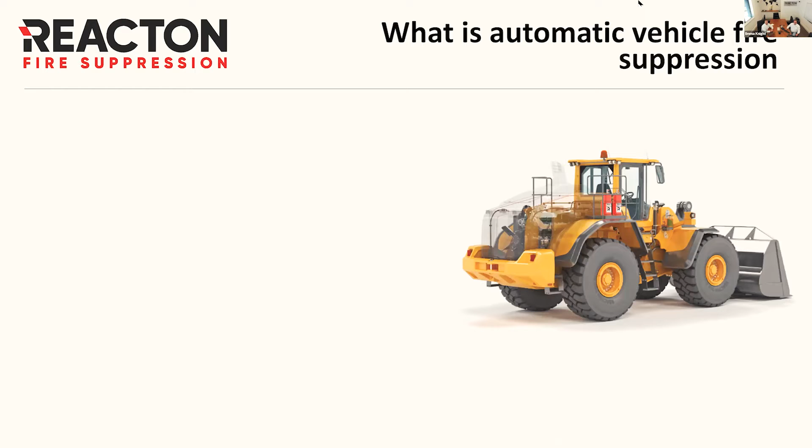So a very simple introduction here is what is vehicle fire suppression. You can see on the side here we've got one of our systems on a machine, but what is automatic vehicle fire suppression? Really it's a way of suppressing or extinguishing a fire event on a vehicle. And when you say suppressing, that's controlling. So they are two different items there. It will need to be completely autonomous. That means that the detection system has to be completely attached and combined with the suppression delivery system to be able to trigger the system and have no intervention from any humans at all.

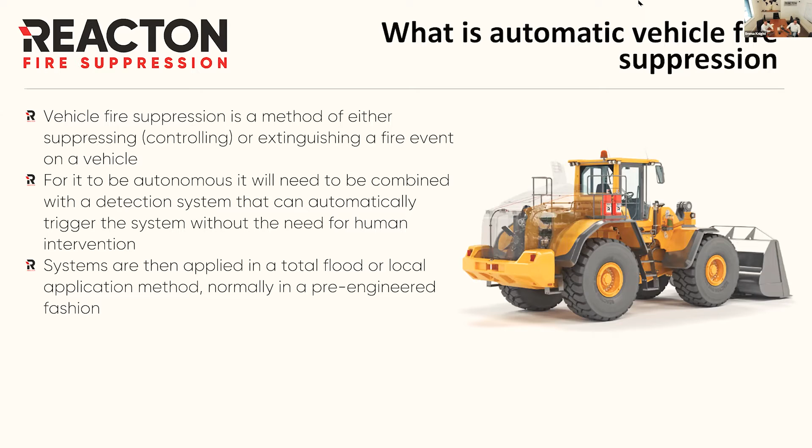What you commonly see for these automatic vehicle systems, they'll be designed in a total flood or a local application method. With the vehicle fire suppression world, they are typically pre-engineered. If you wanted to sum up what an automatic vehicle fire suppression system is, in its simplest form, you have a detection system, an actuation system, and a delivery system. All the agents used on these vehicles have already been tested, and they are the ones that are correct for the classifications of fires that you see on vehicles, such as Class B with the hydraulic fuels and flammable liquids.

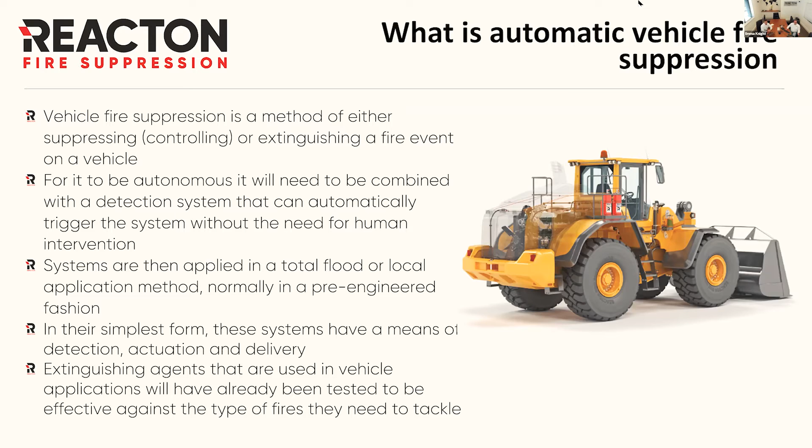So what we want to talk about on this slide is what does this actually look like? What is a typical fire suppression system? We can break these up into key areas, which is probably the easiest way to go through this. Given the time of this webinar, we can't go into extreme detail about each part. But the first part of the system is the containers, the extinguishing agent storage system, and we've got a picture of one of those up on the top right. In this application, we've got a dry powder and a wet chemical.

The extinguishing agent storage system basically holds your extinguishing agent, and these systems can either be stored pressure. In the Reacton example, we have it at 25 bar. However, there are some systems out there that are unpressurized and use a cartridge to propel the system. You then have your detection system, and again, this can be achieved in many different ways.

The most common type that you see in vehicles, because of the complex nature of an engine bay, would be a linear sort of detection, and sometimes that can be electronic, or it can be pneumatic with the burst tubes that Reacton make.

We have a distribution network, which essentially is another way of talking about your pipe work, your discharge hose. This is where the agent comes out of the cylinder and is delivered towards your discharge nozzles. And then you have the actuation system. This is really a means of actuating your cylinder.

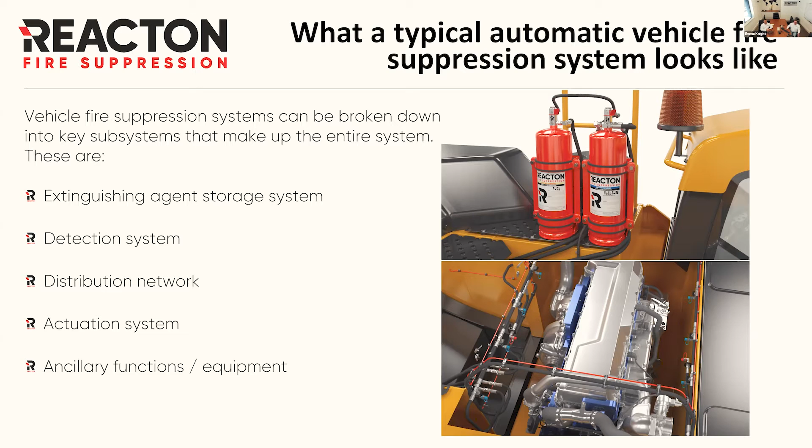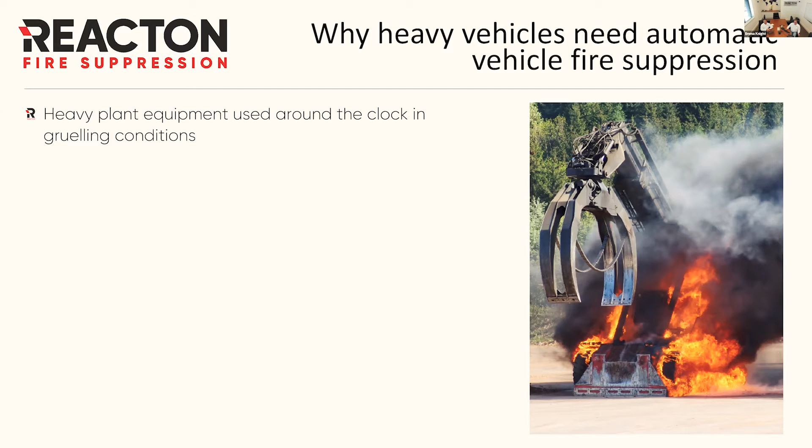Okay, and then on this slide here, we've got why heavy vehicles need automatic fire suppression. A lot of these are very obvious. We're going to run through them pretty quickly, but they have an absolutely demanding life, and they are worked within an inch of their life because it earns you money. If the vehicle's not working, you're not earning money, so they are pushed extremely hard.

So all of these excessive functions that you have on that vehicle increase the temperatures. You have to increase the cooling. Then the flammable fluids are getting much hotter, and it all creates this perfect environment for a fire. And this is why we see them. It's extremely important to have suppression on these.

But if we go to the next one, we've got the problems of the human part of this, where they may not be around to be able to use a fire extinguisher to put this fire out. But even if they are, are they trained? Do they know where to apply it? Are they going to be able to get access to that fire?

The last thing you want to be doing when there's a very high energy fire is starting to open up some of the engine compartments and be that close with the fire extinguisher. So this is where the automatic fire suppression side is really key.

And I think you're going to see that, everyone, later on in some videos shortly. There are two things that Ed just mentioned that I want to reiterate: the human factor, and you're going to see one of the videos of a large fire on a piece of equipment shortly.

The machine is totally unmanned and is operating at full capacity when the fire happens. So I think the time from when the fire ignites to the time that the first person is on the scene is around 25 to 30 seconds. So the issue you've got there is if a fire has been established for 30 seconds, not only have you got a significantly damaged machine, but you've also got a more difficult fire to extinguish as well.

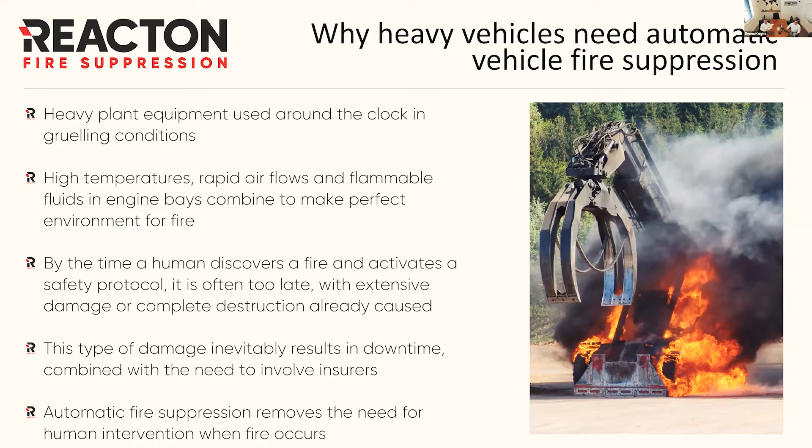So this video is a fantastic video. Again, you'll get this on the presentation. This is a Reacton fire suppression system at work. The system here is fitted to a large industrial shredder. It's a £300,000 piece of equipment. It shreds wood and other recyclable materials. It operates on its own; it doesn't have an operator located near it. Hopefully you can see my mouse. This is the loading area of the machine, and below the loading area is the engine compartment, and this is the radiator side, and you can see some debris on here as well, which is important when I play the video.

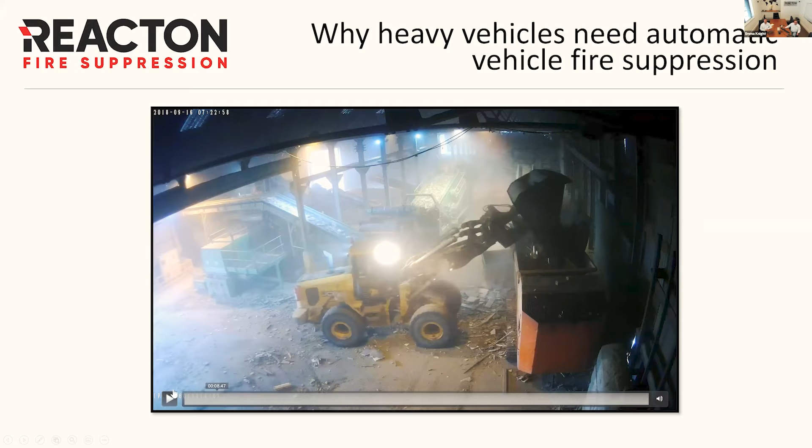I'm just going to check you guys can see the video correctly. So we can see he's loaded the shredder up with combustible material, in this case wood. Okay, so the video is working. We can see that the machine's operating on its own. It's shredding wood, everything's fine, and there's no pre-warning that there's likely to be a fire at this stage.

So the first signs of fire, we can see some smoke coming out of the machine now, and this is a hydraulic hose that is starting to fail. Up to the top of the building is 10 meters, so you can get an idea of how high the flames are when you see the ignition. So what we see is the hydraulic oil igniting. And the system has detected the fire and extinguished the fire in the engine bay and the surrounding areas. The small fire that you can see on the back here is actually a piece of wood on top of the radiator.

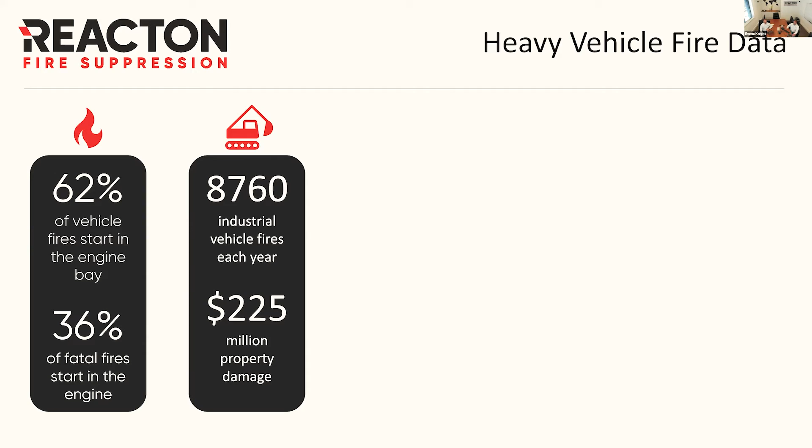Then we have quite a striking number there of vehicle fires each year, and then to have 225 million in property damage is a significant number as well. We move on to the next one here, where we've got 2.7 billion paid out by insurers. So they want to make sure that they're reducing the risk there, and they've got a system that works every time when it's required. So this is why Reacton develop our systems and spend so long in our research and development phase, and want to make sure that these systems work when they're called upon.

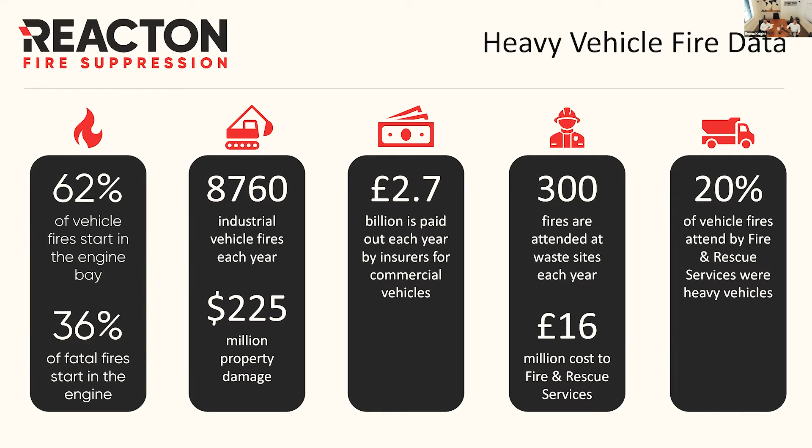The next one here, we've got 300 fires attended at waste sites each year, and 16 million to the fire and rescue services in costs. And our last one on there, 20% of vehicle fires attended by fire and rescue services were heavy vehicles. So that really leads on to our next slide here, where we want to talk about the types of systems and their extinguishing agents.

We know that there are many different types. They come in different sizes and forms because the heavy vehicle market has a huge range of vehicle sizes. But one thing that is very important is you can really condense this, and they all come under the same sort of category of either a dry powder or a liquid-based system. And the reason for that is because they have the best method of extinguishing fires that are found on vehicles. And they're proven time and time again throughout all the different vehicle fire standards that are out there.

Yeah, and what Reacton does in those images you can see there is, unlike a number of fire suppression suppliers, because we have access to all the different range of technologies, dry powder, liquid-based systems, water-based systems, we are not limited to sell through our distributors to customers just our system and tell you it's the best. What we do is we work on it in a scientific manner to ensure that our systems deliver the best performance, regardless of what agent we use.

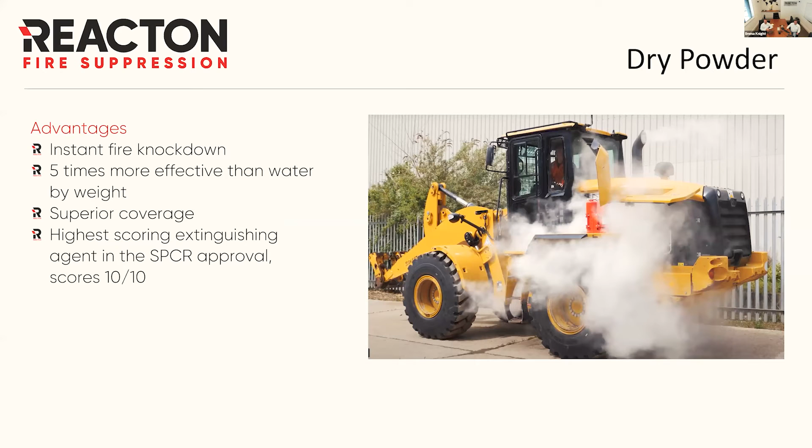So we'll run through this pretty quickly because we're going to run out of time. Yeah, we know we're really motoring on with time, so we've got the advantages here of dry powder. Some nice key takeaways are it's 5 times more effective than water by weight. That's a very useful bit of knowledge there. And it's the coverage, it's the safety margin that I just mentioned that you get with dry powder. And then we have disadvantages there where inherently it doesn't have much cooling properties. And again, you do have a clean down, as you do with any vehicle after a fire event anyway.

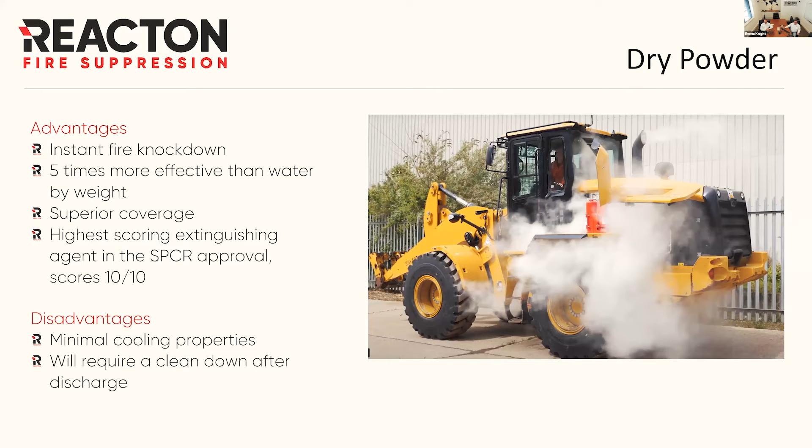Wet chemical systems are unable to deal with hidden fires, and they're fires that are located in obstructed areas, so parts of the engine bay that are not directly within a nozzle's range, and that's significant. On that previous video we just saw, if we didn't have dry powder in there, I would say it's completely unlikely we would have put out any hidden fires in that. I would say it's unlikely we would have extinguished the fire in its entirety. And we certainly would have had more damage to the machine in some areas, because we just wouldn't have been able to have covered every area in that engine bay, as you only have a limited number of nozzles.

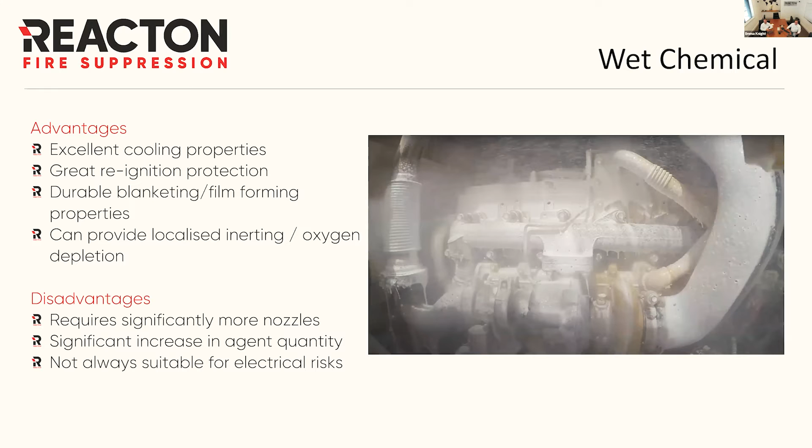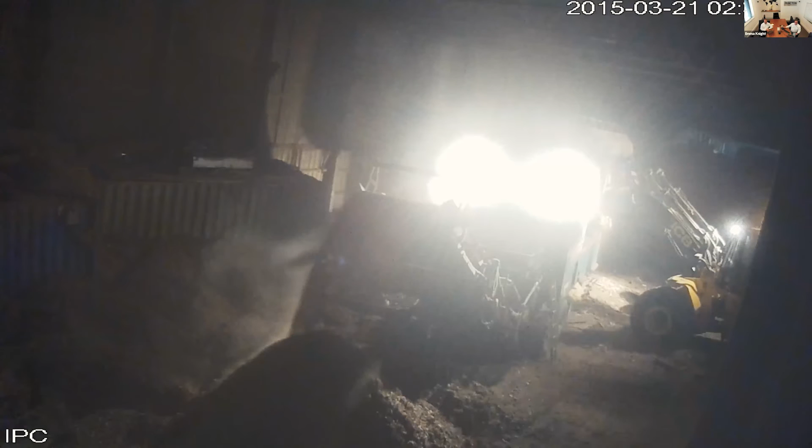So what we're going to watch now is a similar type of machine. I'm going to pull this full screen. This is the same industrial shredder as the one we just saw. And I'm going to show you what happens when you use a system that isn't designed to deal with large fires as per the SPCR testing, and also isn't designed to deal with hidden fires. And as I said, hidden fires are those fires that are out of the reach of nozzles, below the engine, in small compartments next to the engine, or if flammable fluid is sprayed across the engine, it will get into areas that a wet chemical system can't get to.

So we've got a shredder here, we've got material coming off the end of the machine, and we've got another loading shovel loading the shredded material into the hopper here. So the engine is located in this area, so hopefully you guys can see this, just where the bright lights are. And the fire is going to happen where my mouse is now. So it's going to start just on the lower back side of the engine. And this system in here is a water mist system, a well-known water mist system brand.

And if I flick through to when this fire starts, so it's about here, and I won't be able to play you all of this because we will be here until about 1 o'clock in the morning, I think. So you can see a fire that's just started below the engine bay here. I'm going to take this slowly because I know the video is playing slightly slower than we'd want.

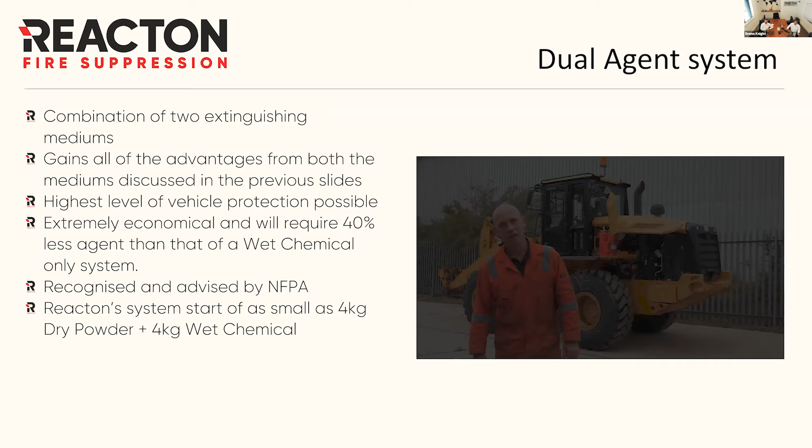So one little point at the end there is Reacton's dual agent system, approved and A+ rated, is as small as a 4 kilo powder and a 4 kilo wet chemical. Okay. Oh, sorry, a bit premature there.

So the next video is for our distributor network and for all of our engineers around the world. We do some interactive video training. And at the end of the installation training, what we do is we set off the system that we've installed. On this particular training video, this was a CAT loading shovel. So we're going to see a P-Mark A+ rated dual agent system being set off from an in-cab manual actuation point.

So inside the operator's cab, we're going to press the button. You'll see the system discharge, and we've got a nice camera in so you can see the wet chemical doing its trick. The machine's running, and this machine has engine shutdown fitted, and it has a battery isolation option as well that basically isolates the batteries when we detect or manually actuate the system. So I'll let David Brand, one of our engineers, take over the introduction.

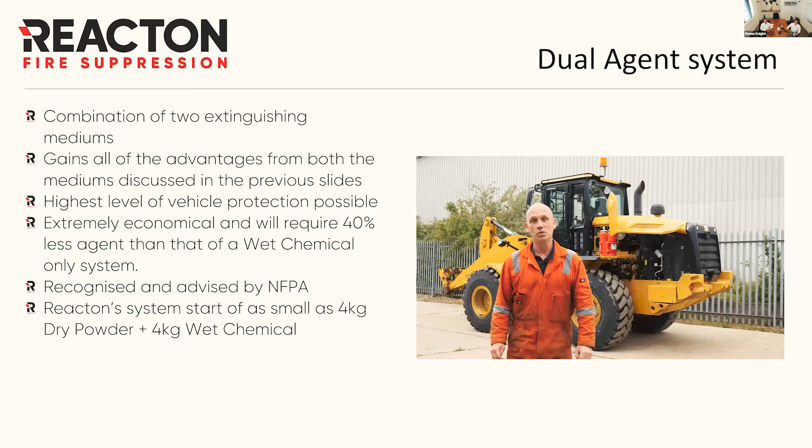Okay, so we completed the installation. We're now going to show you a system discharge. We're going to activate the system using the in-cab button inside the cab. You'll see throughout the discharge that the engine will shut down and the batteries will isolate.

Spraying onto the manifold at the end of the video. I'm just going to get confirmation that the videos are finished.

So, although a brief video, and you'll see it in the presentation pack when we send it out, we've got lots of these clips which we want to make available to everyone in the webinar and everyone that's interested in learning more about vehicle fire suppression systems. It's really good for us, and we really enjoy it, because very little is known about vehicle fire suppression systems, and there's even less videos and interactive content about them.

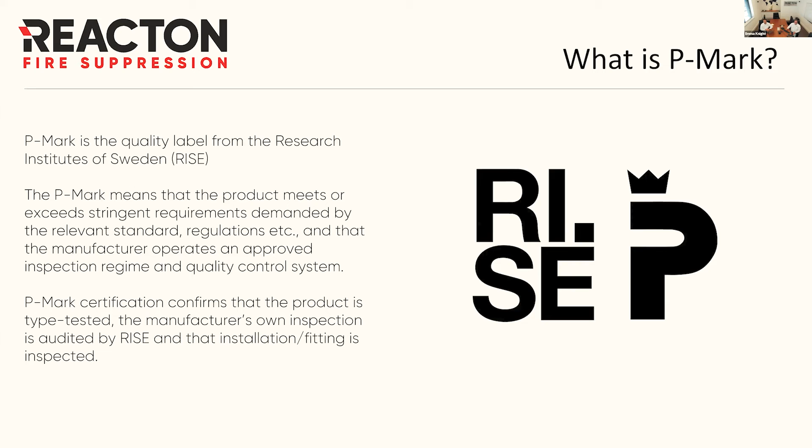So we're going to quickly pull on to P-Mark now. Yeah, so we know we're getting through the time here, so we won't go through this in too much detail, but really we want to talk about why Reacton have chosen P-Mark. But first of all, what is it? Basically, it's saying that you've made a decision that you want to have a quality system that has been confirmed by a third party. It means the product meets or exceeds these stringent requirements, and they're internationally recognised standards that they're being tested to. But it also looks at the manufacturer itself. So it's not just fire testing, it has a lot of other parts to it.

So when we talk about the dual agent system, because it's heavy vehicles, it's the P-Mark SPCR 199, which is their certification rules 199. And it's been developed purely for heavy vehicle systems, the engine compartments of heavy vehicles. And this is really the key performance level certificate from RISE for vehicles, and it has hugely demanding tests, and they've been made much harder than the previous SPCR test, which is 183, where you're not allowed any reignition. So this is an extinguishing system, not really a suppression system.

So we are not allowed any reignition, and we have the addition of tests where there is no closings on the actual test rig. So you can have an open ceiling, an open floor, or the complete test rig open, which really does prove the local application route of these systems. So in essence what that looks like on a machine is, those that are familiar with heavy vehicles will know that a number of machines don't have a belly pan underneath the machine, they're open.

So the more open you make an engine bay, the more difficult it is for a system to extinguish. So what you might find is systems being installed to large wood shredders where the engine sits above the machine and it's totally open, but the systems have always been tested in an enclosed environment. So you would argue that it's never been tested to deal with fires in a totally open manner. So that's why the classification and rating of openness is something that we and insurers look at when considering if a fire system is suitable for the application.

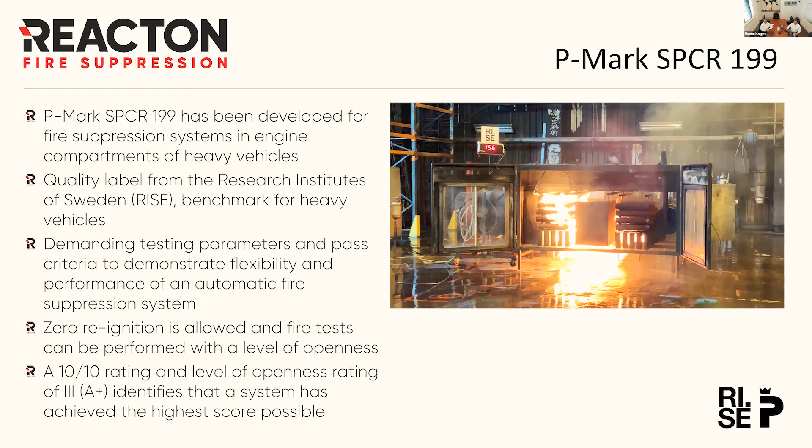And Reacton not only deliver an A+ rating, so we pass all of the testing, and we're not going to have time to go through that today, but I'll be sure to pass on any questions. But also we have a rating of openness of 3, which means that the system is suitable to be installed to an engine bay that is totally open and not enclosed. So I think we'll just skip through this, because we're going to run too tight. So I might just take this.

So we selected P-Mark for a really simple reason. It enables a really fair comparison between fire systems. It enables you to compare, as I said earlier, the difference between a system that is certified to deal with extinguishing fires in certain environments and some that are not. Also, you've got very standardized test protocols that are used, so repeatable fire tests. Unlike some standards like SBF tests, an SBF accredited system, it's a one test pass, you can't repeat the testing, and it's not very scientific.

There's a robust risk assessment that goes with each vehicle before you install, so we're looking at vehicle design as well as a full risk assessment before a system is fitted, and that's in line with the P-Mark standard. And the design, production and installation control that is done by RISE ensures that they check our systems are installed in accordance with P-Mark, and that we're following our own standards that we set for it.

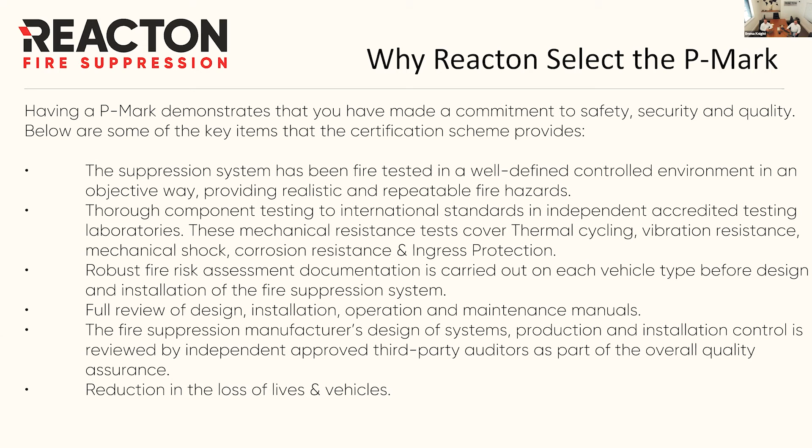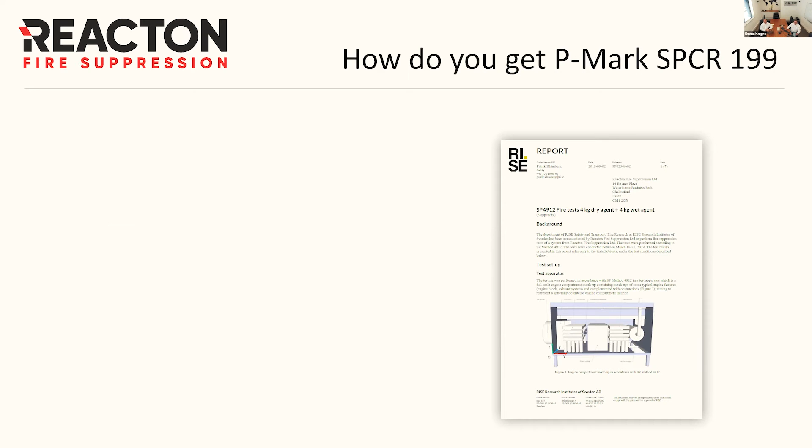I think we'll come on to how do we get it. I think this is relevant, isn't it? Yeah. Really, what the P-Mark is made up of is the fire tests, which there's a report there for our 8 kilo, which is made up of the 11 tests, the 11th one being the reignition.

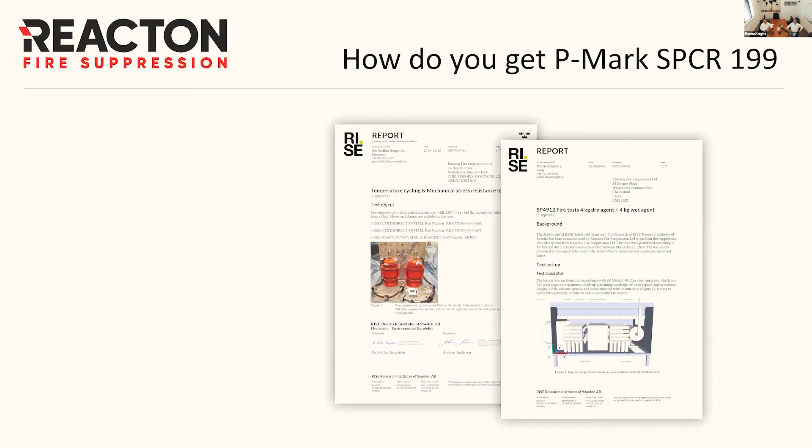Then you have the temperature cycling or mechanical stress resistance tests, which we're going to detail in a bit. And then you have the corrosion part as well. And then that all adds up for you to get your certificate. But there's a step in there which is the auditing: there's a factory production control, there's an audit of Reacton, our manufacturing, our quality, and how we track everything. And they audit our installs as well.

I think just moving on pretty quickly, but it looks on screen, guys, that it's a really simple process. It's not. It took us 24 months, 2 years to get our P-Mark SPCR 199 system certified. It's not just 4 pages, there's some 500 pages of test reports and documentation that go into it. And at all stages through this, the system is tested to ensure that it discharges.

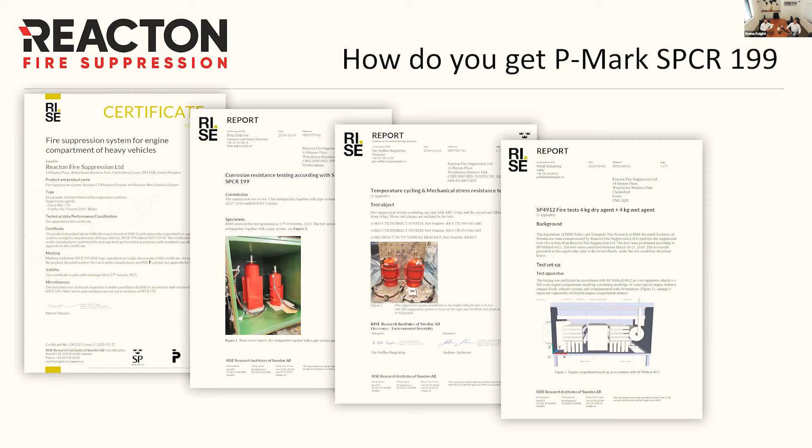So after 96 hours of vibration testing, the system is tested to ensure that it still discharges and it performs as it should do. So it's an extremely robust set of standards, and it's why not a lot of manufacturers have yet to achieve this standard, because of the difficulty in achieving the standards that they've set for the systems. So the fire testing overview, we haven't got long left, so I'm going to flip through this.

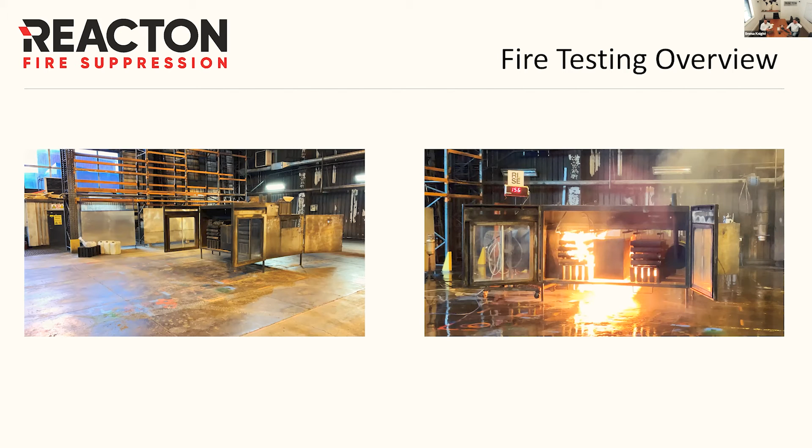The fire testing overview, some of you will have seen these videos and some of you will have not, but the fire testing video is a controlled mock-up engine bay that simulates, or tries to simulate, an engine bay with obstructions, an engine block in the middle, and then a number of test parameters around it. So we will just play this video.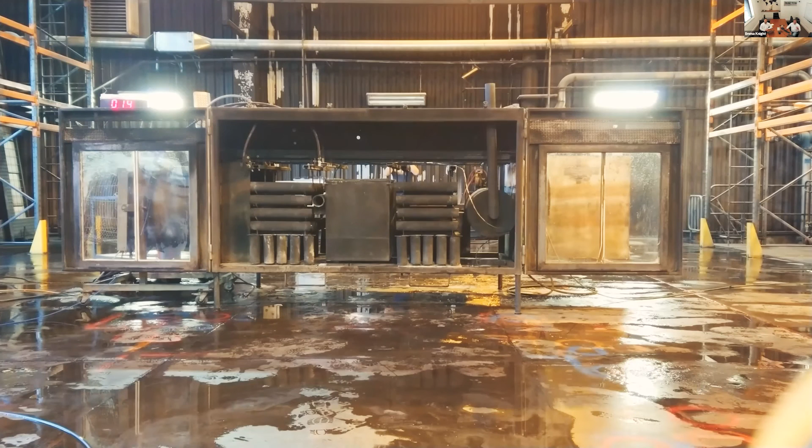I'm just going to pause this and talk. So we've got a mock-up engine bay in front of us. We've got 2 obstructions left and right. So you can see, bring my mouse on here and here. And we're going to set up a number of fires in this enclosure. This is an open enclosure test.

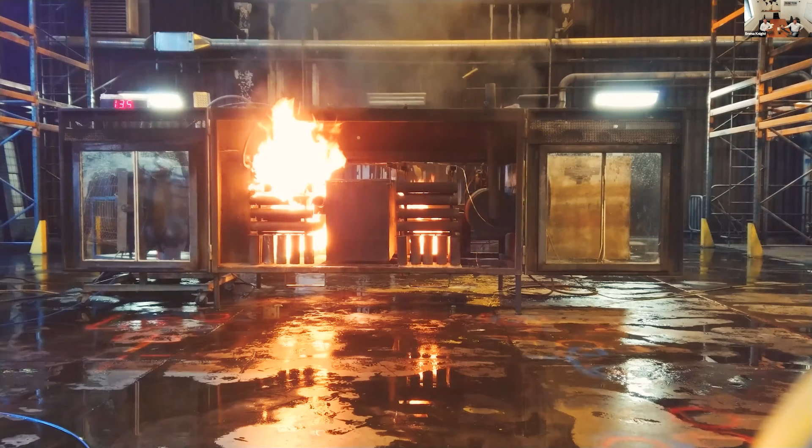So at 1 minute 30, the fan starts, and that simulates airflow in the engine bay. At 1 minute 50 on the counter up here, we start spraying a heptane mixture, which is a flammable liquid mixture, to simulate a burst hydraulic hose. And then we manually activate the system at 2 minutes. None of this is automatic. This is enabling a pre-burn.

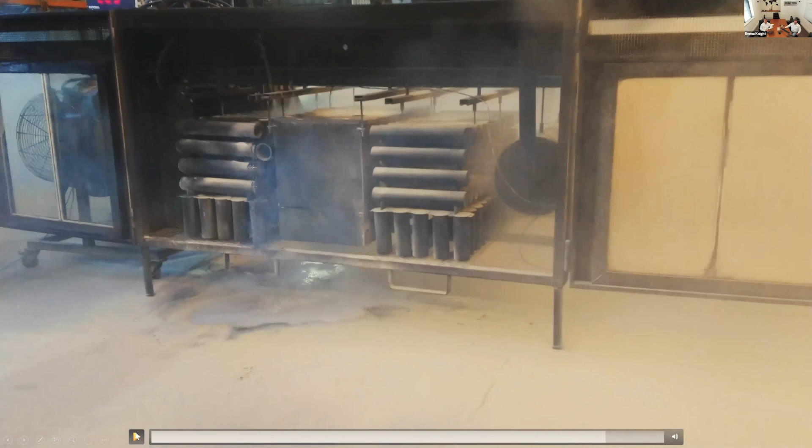Hopefully the video sort of caught up. What you can see here is the dry chemical system has done its job, and what we're doing is we have the wet chemical spraying on the simulated hot parts of the engine bay to cool down those areas that we talked about, the reignition hot areas. So we're going to run out of time here, so I'm going to forward this.

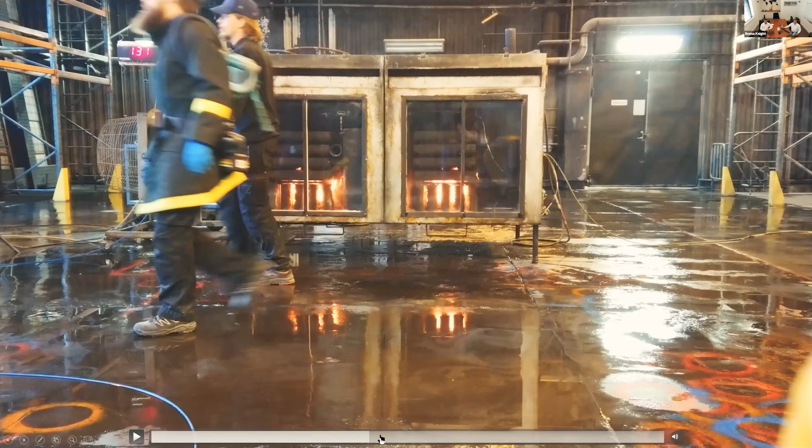This is another test, and this test is where the water-based systems fail to work, and this is exactly the scenario we saw on the shredder earlier that burnt out, and this is a hidden fire test. So we place fires at the bottom here. This is an enclosed test, and what we do is we run to

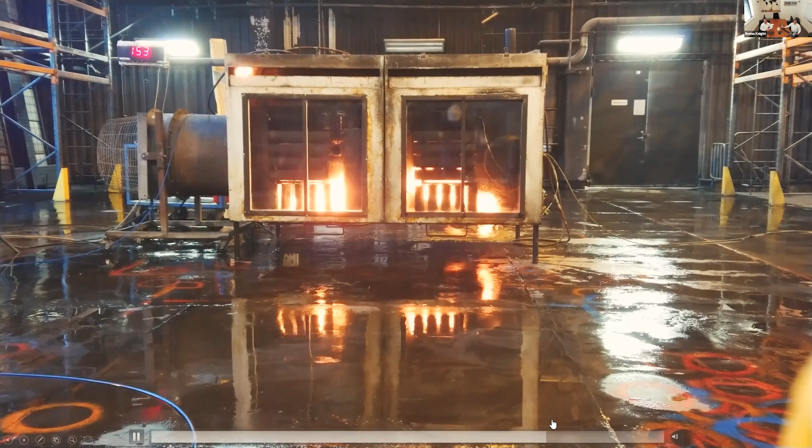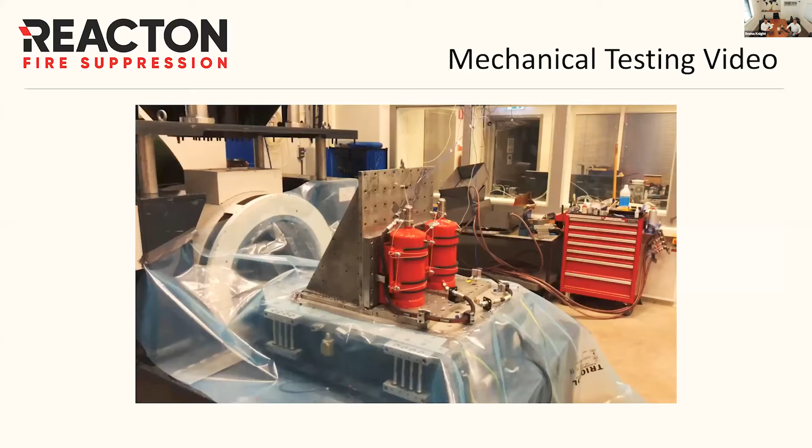see is the dry powder totally floods the enclosure that we're protecting and extinguishes all of the hidden fires. So we're at the 45-minute mark, so we're going to flick through this. This is the mechanical vibration test.

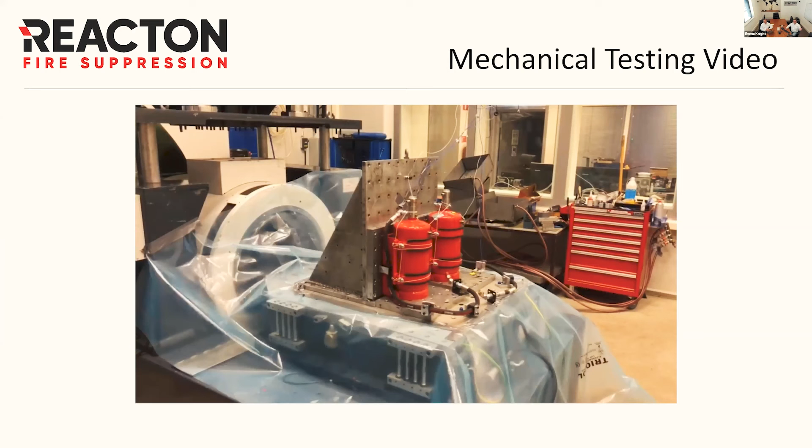Directions that it's particularly subjected to in that direction. We turn the table and then we turn it again. So all three axes are tested for 32 hours, and if I compare that to Factory Mutual approval, they are only subjected to 4 hours in each direction, whereas we're testing for 32 hours in each direction.

And also on that point, there's a series of shock tests, and it basically equates to 5,060 shocks between 10 and 20 Gs. So that goes on after those 96 hours as well. So it's a pretty robust vibration and shock test.

So in terms of where we sit in the market for heavy vehicle approval, we're the only global fire suppression company currently certified to P-Mark SPCR 199. We have the highest rating available, an A+, and we have the highest level of openness, level 3.

When you're looking at the old approval for buses and coaches or light vehicles, SPCR 183, we're also the leader for system size and rating for that as well. So brands like Dafo, Fogmaker are still a C-rated system even on SPCR 183. So at the moment, we're market leaders for 199.

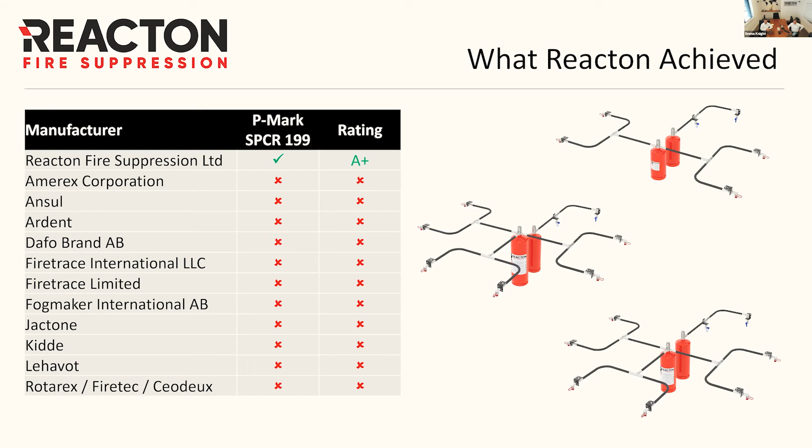And even though we will have competitors join us, what we've done is ensure that we have the smallest system to ensure that even the smallest bits of kit can be installed with a certified P-mark 199 system. As you'll often find, people will claim to have a P-mark system but will actually fit a much smaller system which doesn't carry the approvals. So we've designed our range of systems so regardless of the size of the machine, you can fit a certified A+ P-mark 199 system.

So just a summary really from us. What do we do? How do we do everything? We have world-class documentation. Ed actually oversees all of the documentation, whether it's training or system documentation. A sample of that you can see on the screen, and some of you will have seen that in content that we've had from us. World-class training, so we offer on-premises training and online training courses. Our training courses are filmed with our global engineers in each step, and those steps are used by OEMs and other global manufacturers.

World-class communication, we work with all of our distributors through a number of communication platforms. We understand a lot of the frustration of suppliers of other systems. For us, the priority is the customer, and the priority is the distributor. So we work round the clock to ensure that our customers and distributors and their end customers are looked after in a manner that we deem to be acceptable, and we ensure that regardless of anything that arises with systems support, we deal with it in an A+ way. So yeah, a big part of our company culture is looking after our customers and making sure that every step of the journey they take has been supported.

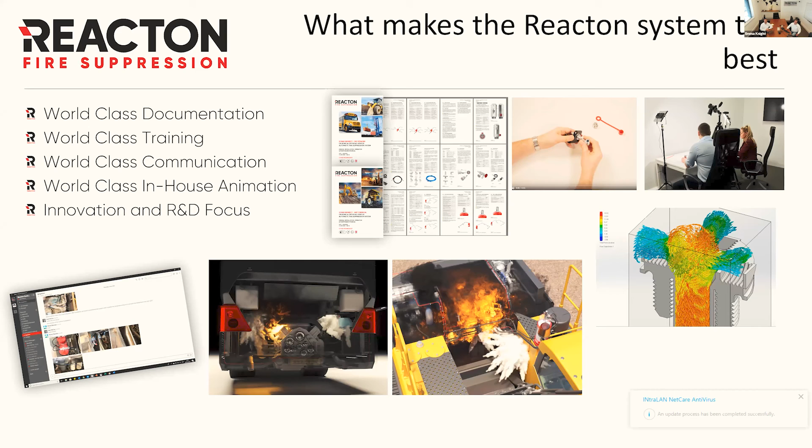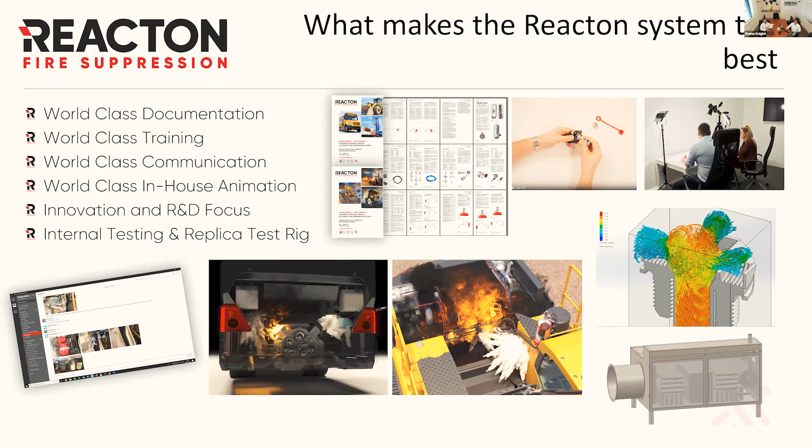All of our marketing animations that you might have seen are designed and rendered in-house, so we're able to support a number of OEMs and distributors with custom animations like you can see at the bottom. And all of our R&D is also performed in-house here. We also have our own version of the test rig that you saw earlier, which we conduct pre-testing on, as well as demonstrations for OEMs and partners. So anyone wanting to see systems tested or wanting to use the test rig, we always invite them in to be able to use it.

So we're 4 minutes too late, so apologies for 4 minutes. We'll have to trim it up a little bit. I think this has been the fastest time we've ever done a presentation on heavy vehicles, so it's not a bad achievement. Just having a look at questions now.

So what are the system sizes? The smallest vehicle system size is 4 kilograms of both agents, so 4 kilograms of dry chemical and wet chemical, and we go up to larger sizes for much larger pieces of equipment, so up to 40, 50 kilo size systems. And the benefit of our system is it can be connected to multiple cylinders. So you could have two 4 kilos if space is a limiting factor for you, or you could opt to have 1 cylinder.